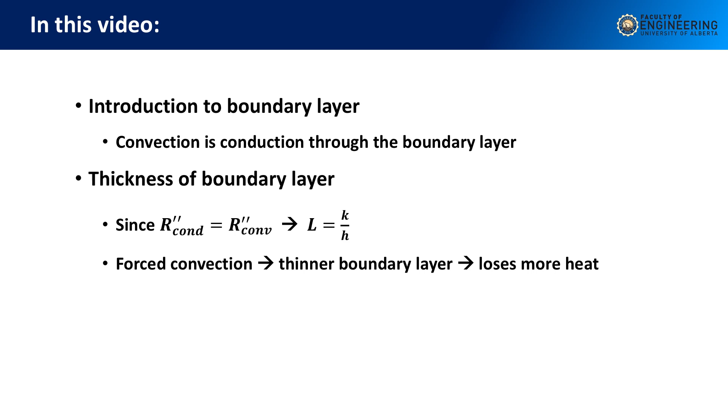So far, we did energy balances and the formulas that let you calculate some things. I want to give you an example, getting a little bit into the physics, something cool. And this is a story I want to discuss: boundary layer. That sounds scary, right? But let me tell you this story.

I understand you did with Ying this example in which you calculated how your metabolic rate balances with your heat losses by convection, right? Isn't that amazing that the same thing that says in the wrapper of what you eat, you need more or less 2,000 calories a day, is the amount of energy you're going to lose through your skin. It's no coincidence, right?

And let me tell you something about the physics. How does it work? The air moves around you, or the water moves around you, right? And something that this guy Prandtl, just about 100 years ago, discovered is that the air away from you, or the water away from you, is moving fast, and viscosity plays very little role. But right on your surface, it gets stuck, right?

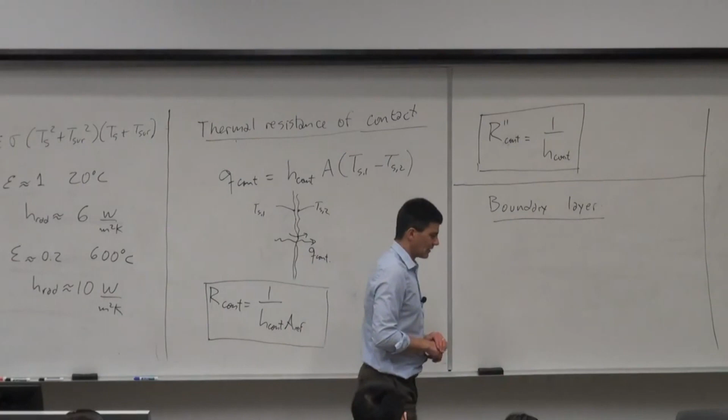So when we talk about convection, in reality, and this is super important because we're going to use it later, when I said convection doesn't exist, right, what really exists is conduction through this layer that is stuck to your body, all right? So my mission to you guys is this.

If you believe me this, and I'll show you videos and much more stuff, if you believe me that the convection comes from a thin layer of this fluid that got stuck on our skin, I would like you to tell me what is the thickness of that layer.

How would you go about it? What is the thickness of the layer, right, of the air layer that is stuck on my skin, such that I have 10 watts per square meter Kelvin in convection? How would you go about that?

The reason I lose 10 watts per square meter Kelvin and not more is because of that layer. If you go swimming, you're going to lose a whole lot more, 1,000 watts per square meter Kelvin. That's why you don't swim at 20 degrees, you're going to freeze, right? Your metabolic heat, the 2,000 calories, they don't make up for how much you lose through your skin.

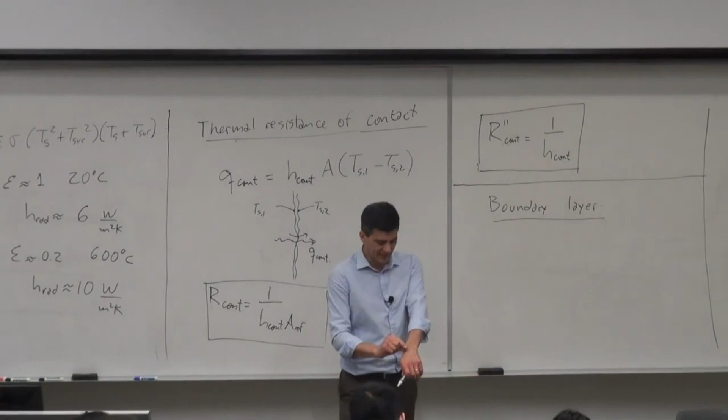So understanding that we have this layer, you can be naked, but you're not naked. You have an invisible jacket of air. Now, so what is the thickness of the jacket?

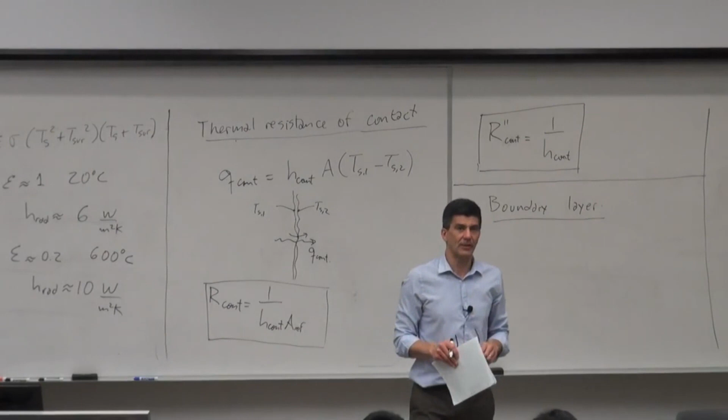I like what you suggested, Fourier's law, right? And so if it is a thin layer, right, and we elaborated on Fourier's law, if it is a thin layer, can I use the plane wall learning we have? Can I say that the air around my finger is a plane wall? Well, that depends if it is thin or not, right?

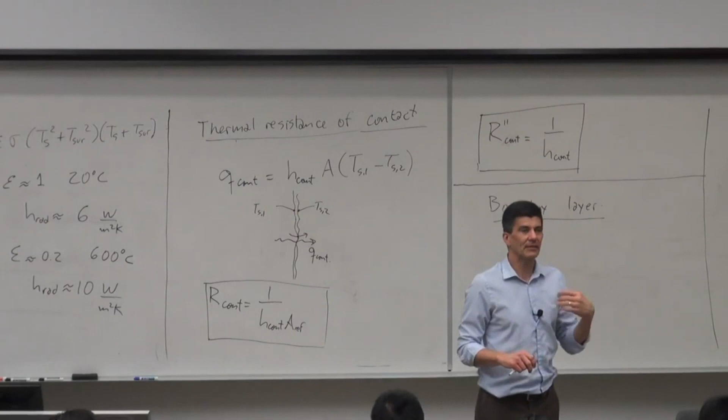So let me teach you something that is super cool. It's called self-consistency. Let's assume it is very thin, let's come up with all our story and then verify. If I predict that the layer is 1 meter thick, it didn't work, right? But if I predict that the layer was 0.5 millimeter thick, I'm okay with it, right?

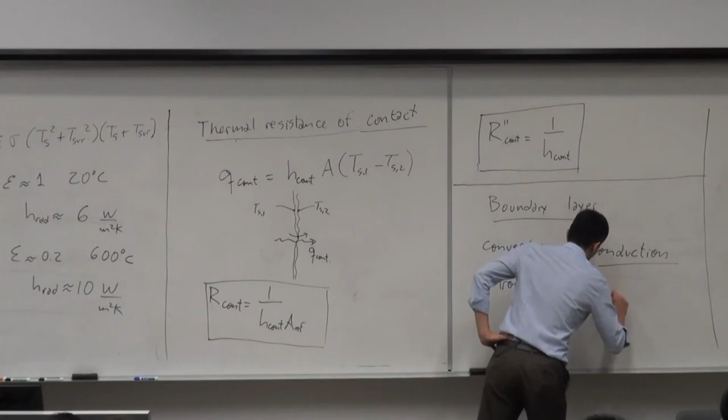Convection is conduction through a boundary layer. I'm going to start by assuming a boundary layer is thin. Two things: number one, it is thin, so I know the end of the story. But the other thing is, if I assume it's thin, I can do lots of cool things. So it is convenient to assume it's thin, even if you didn't know the end of the story, right?

So if the boundary layer is thin, we can use this plane wall. And Fourier's law told us that the resistance of the plane wall is L over K. What would L be in this case? It's the thickness of the layer, right? That's what it is. I don't know what the number is, but what is K?

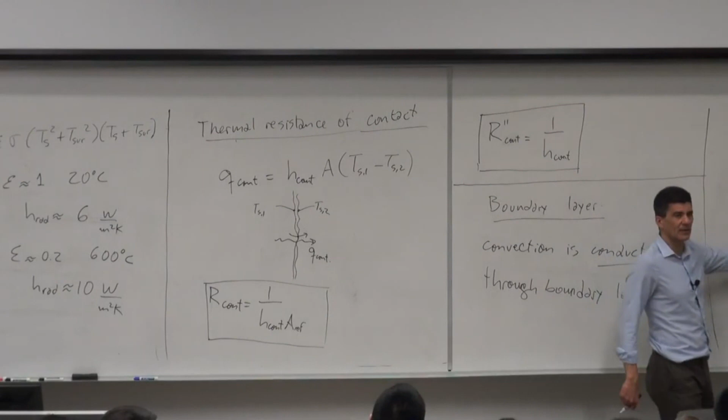Thermal conductivity of what? My finger? Of the air, right? Or water, whatever it is, of the fluid. So for air, we have K is more or less 0.03 watts per meter Kelvin. That's from the book.

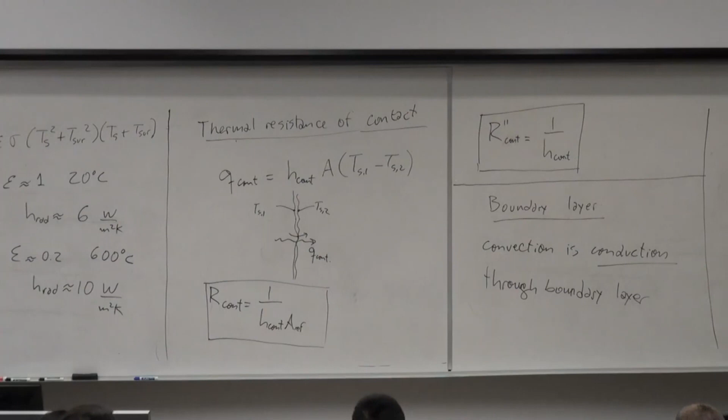Okay, so that is for conduction. But we said this is, in reality, convection is a shorthand for this conduction, right? This came from Fourier's law. The resistance of conduction should be the same as resistance of convection, right? Because what I'm saying here is we call it convection, but in reality it's conduction. It's the same thing. We take a shorthand, a shortcut, and we call it convection.

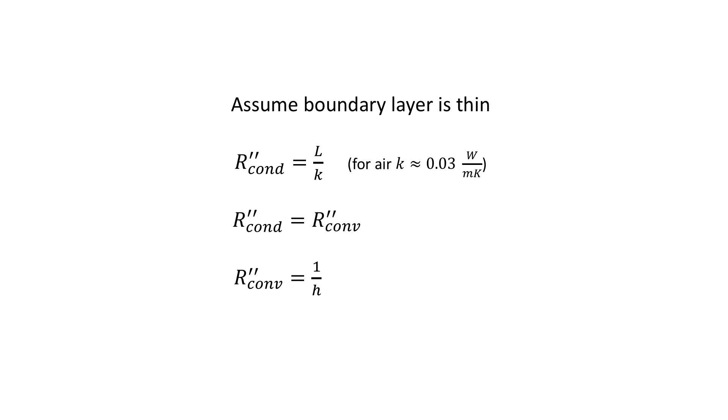How did I calculate the resistance per unit area of convection? 1 over H. What is H for still air? I've been saying it a million times now, more or less 10, right? Still air means natural convection, right?

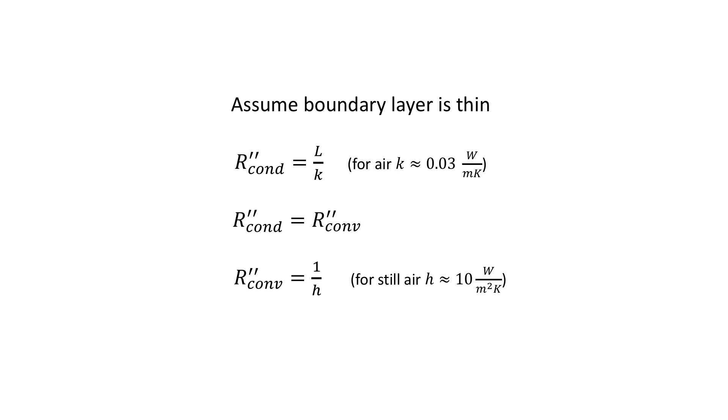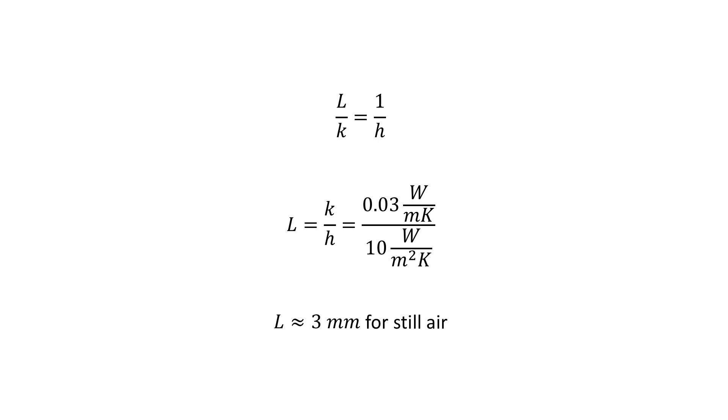I said reality is the resistance preventing me from freezing to death is L over K, and we have tabulated it as convection. This amazing invention that is so practical, but in reality is nothing but conduction through a boundary layer, is 1 over H. For air, this would be 0.03 watts per meter Kelvin, H is 10 watts per meter square Kelvin. The watts go away, the meters go away with this and comes to the top, Kelvin go away, and I have L is more or less 3 millimeters. So our jacket, if we don't move, is 3 millimeters thick.

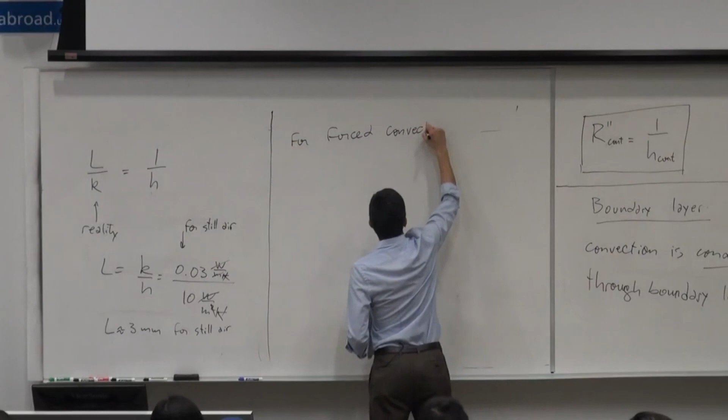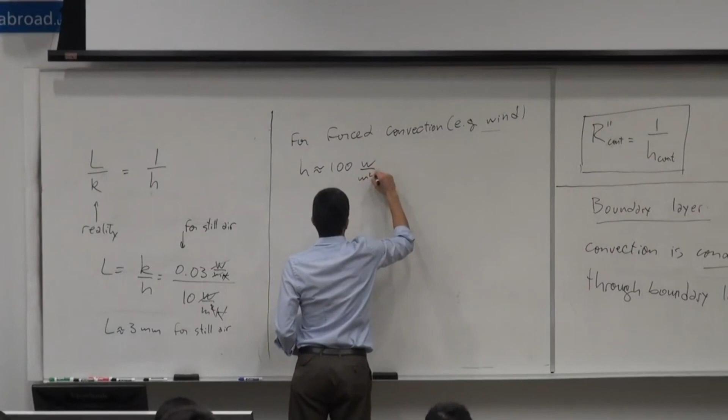What if there is wind? For what is called forced convection, we have H is more or less 100 watts per meter square Kelvin. L equals, what would be the thickness of the boundary layer if you're riding your bike? 0.3 millimeters, that's right.

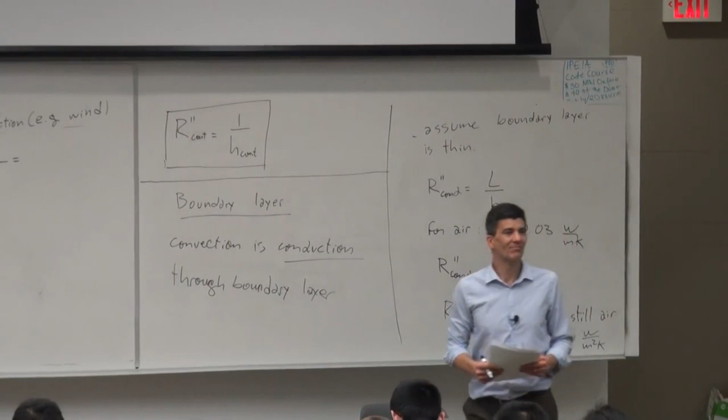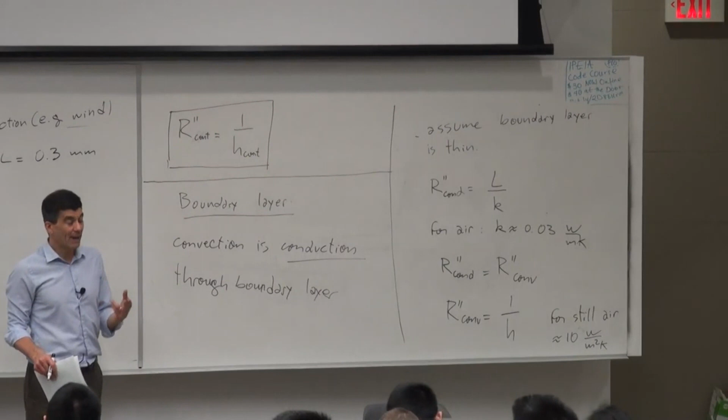And this is a story of why, like, we would use a fan or something. If they blow air on us, what happens is we make a thinner boundary layer, and that's the reason we lose more heat.